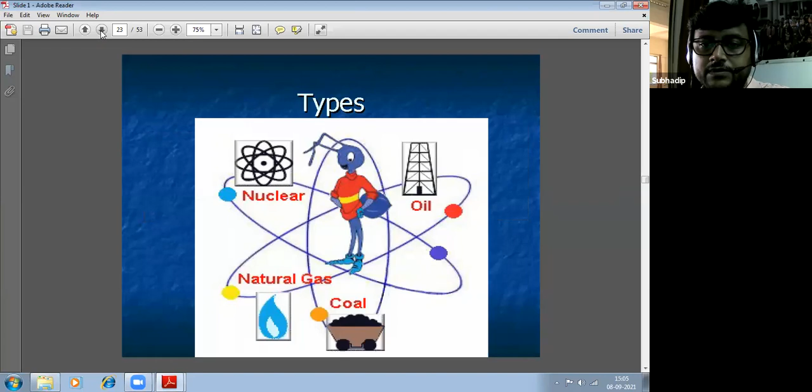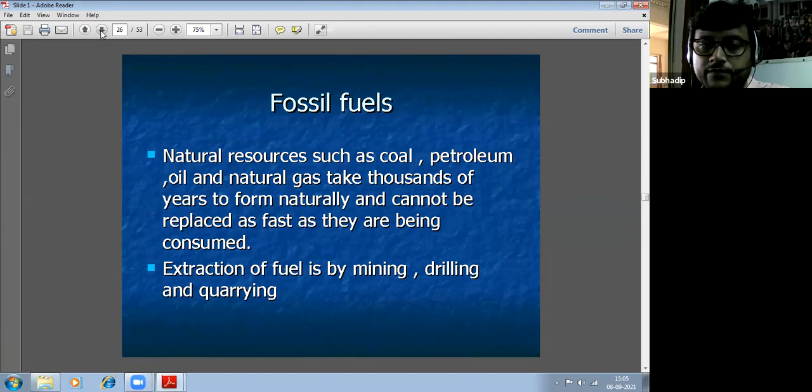On the last day, regarding renewable energy and non-conventional energy, we discussed the non-renewable sources like nuclear power, and the types: nuclear, oil, natural gas, and coal. Coal, petroleum, and gas - this introduction we have discussed, including fossil fuel and how coal can be made. And how coal is prepared, we gave a brief introduction regarding this.

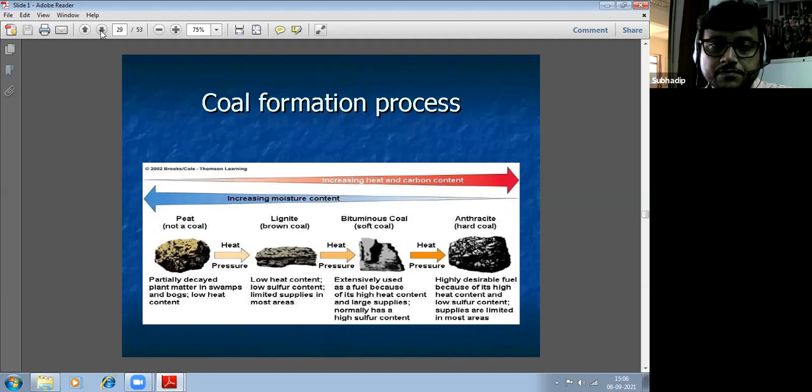Then the coal formation processes, and what are the different disadvantages of coal. When coal is burned, it produces carbon dioxide that causes global warming. Since coal contains impurities like sulfur and nitrogen, it produces toxic gases during burning, which causes acid rain and air pollution. Traces of mercury and radioactive compounds are also released when coal is burned, causing severe human health threats like lung disease.

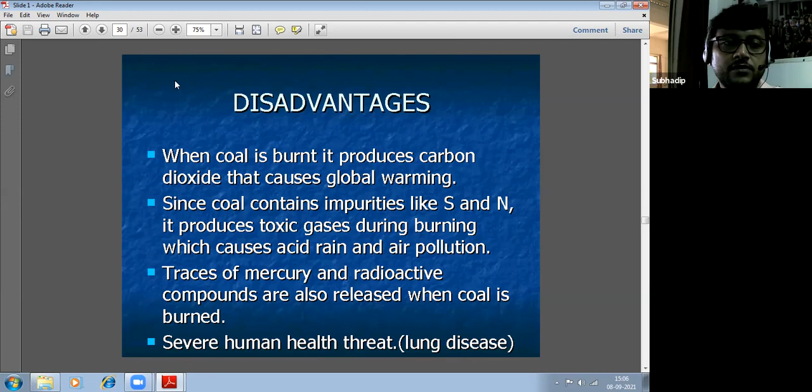Now, oil and natural gas. India has about 0.04% of the world's proven reserve of hydrocarbons.

Using distillation, we are able to separate... Actually, I'm having a mouth ulcer, so that's why I'm not able to talk properly.

Crude oil is made of many different compounds, each with its specific boiling point. Using distillation, we are able to separate out these compounds and turn them into commercial products ranging from gases to asphalt.

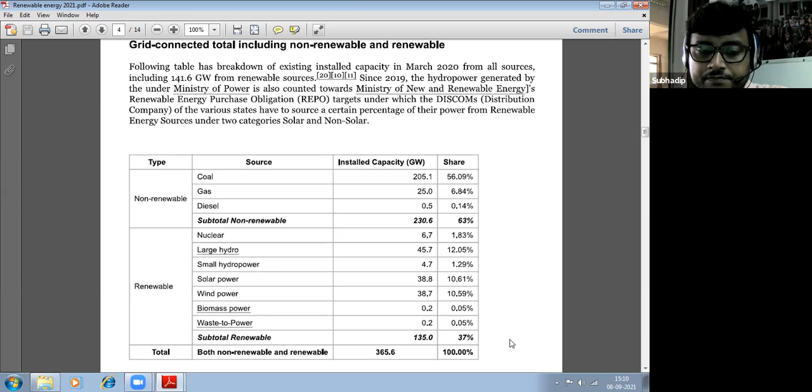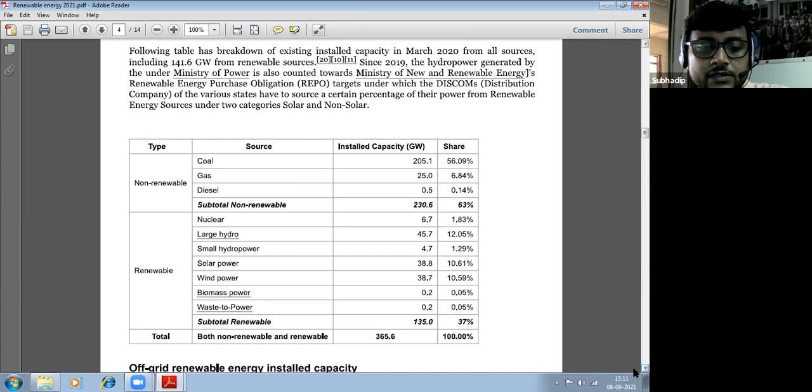Small hydropower has 4.7 gigawatt, solar power has 38.8 gigawatt, wind power has 38.7 gigawatt, biomass power has 0.2 gigawatt, waste to power is 0.2 gigawatt, and separately from renewable we have 135 gigawatt. So from both non-renewable and renewable, we have totally 365.6 gigawatt installed capacity.

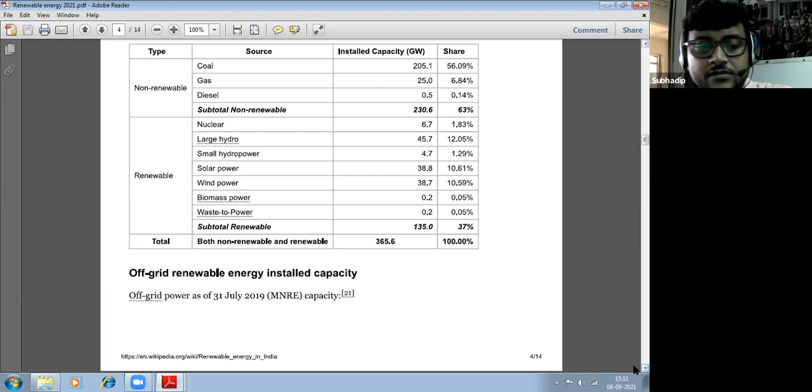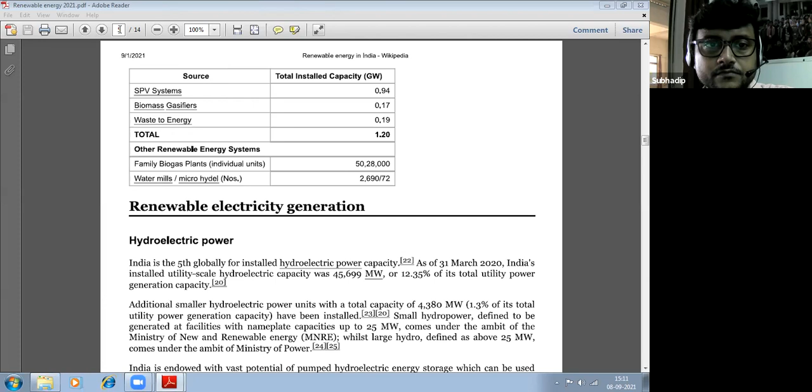Now another thing - off-grid renewable energy installed capacity as per 31st July 2019. This is the source and the total installed capacity: SPV systems having 0.94 gigawatt, biomass gasifier 0.17 gigawatt, waste to energy 0.19 gigawatt, and total is 1.20 gigawatt.

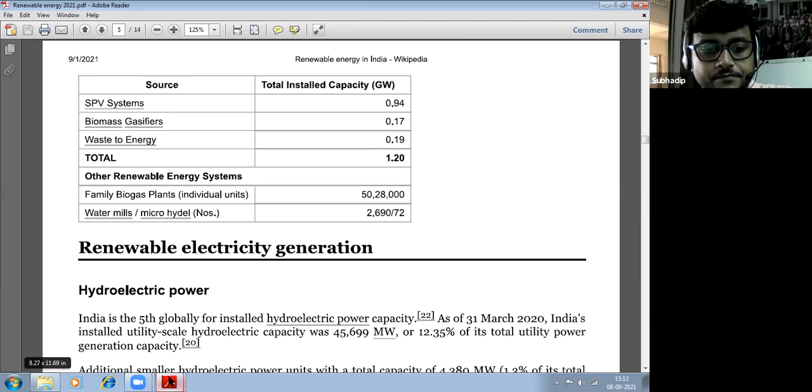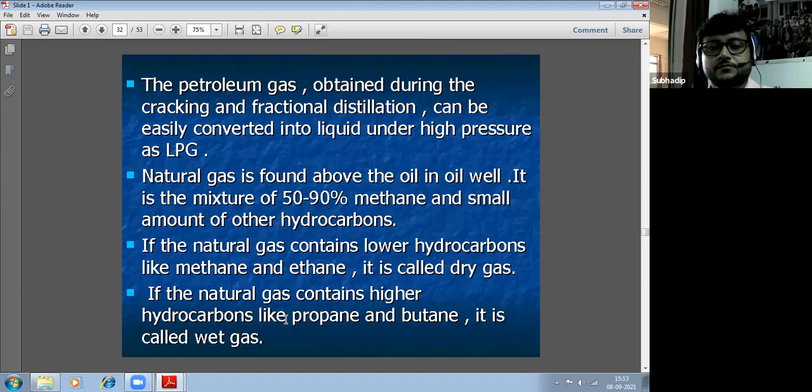Next, petroleum. Petroleum or crude oil is a naturally occurring flammable liquid consisting of a complex mixture of hydrocarbons with small amounts of sulfur, oxygen, nitrogen of various molecular weights, and other organic compounds that are found in geological formations beneath the Earth's surface.

How are oil and gas made? In the ocean, 300 to 400 million years ago, tiny sea plants and animals died and were buried on the ocean floor. Over time they were covered by layers of silt and sand, and about 50 to 100 million years ago, the remains were buried deeper and deeper. The enormous heat and pressure turned them into oil and gas. So from these sea plants and animals, we get oil and gas.

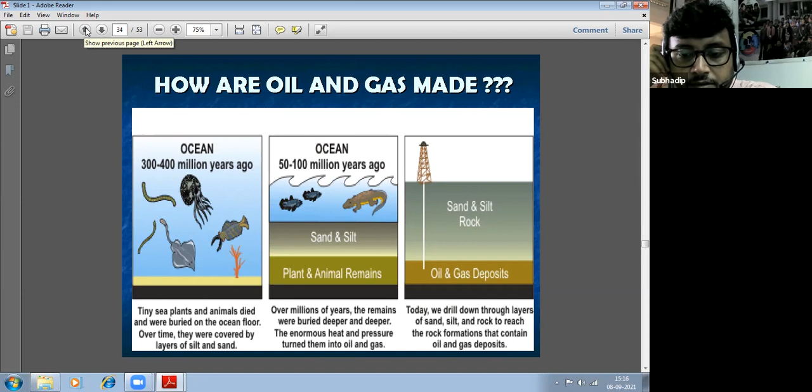When we heat the crude oil, sometimes we get diesel oil, then heating oil, aviation fuel, then gasoline, and then gases. So there are different segments for obtaining the different products at different stages.

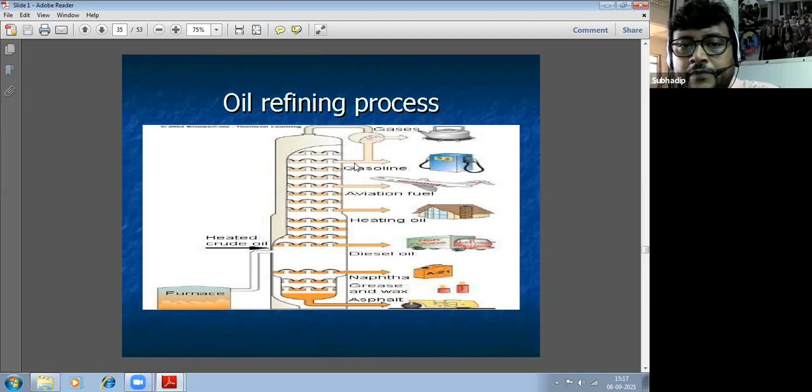Now what are the advantages and disadvantages of natural gas? Natural gas has ample supplies, high net energy yield, low cost with huge subsidies, less air pollution than other fossil fuels, lower carbon dioxide emission than other fossil fuels, moderate environmental impact, easy transport by pipeline, low land use, and it is good fuel for fuel cells and gas turbines.

What are the disadvantages of natural gas? It releases carbon dioxide when burned, and methane, which is also called a greenhouse gas. It can leak from the pipeline, and can be shipped across the ocean as highly explosive LNG. Sometimes it is burned off and wasted at wells because of low price.

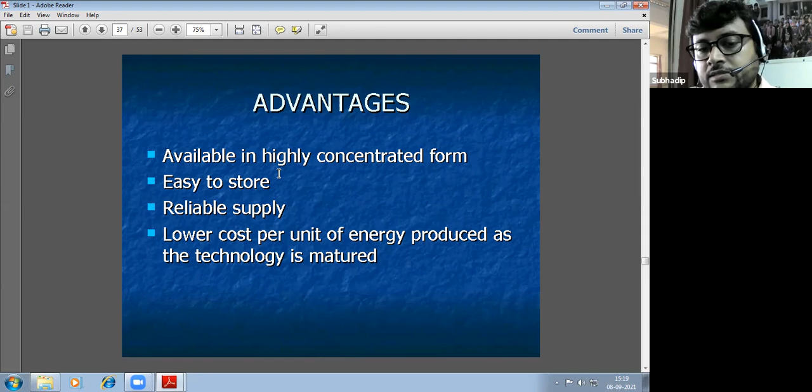So what are the advantages of conventional sources? It is available in highly concentrated form, because when required, you can directly go and purchase it. It depends on our storage from year to year. It is easy to store, has reliable supply, and lower cost per unit of energy produced as the technology matures. The disadvantages are: it is highly polluting, available only in few places, has high running cost, limited supply, and will one day get exhausted.

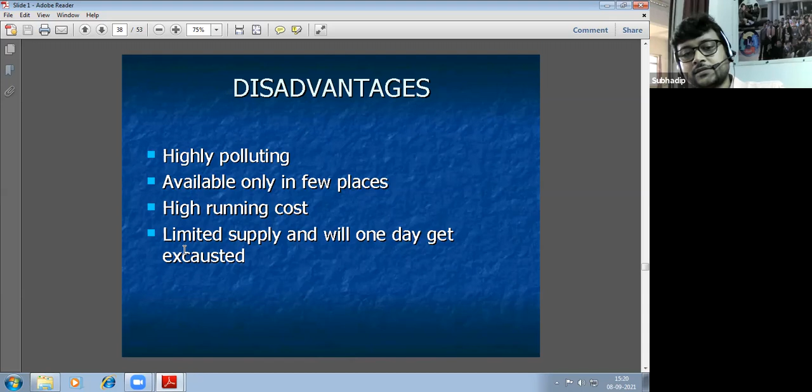Now how do we use it? Whatever renewable energy and non-renewable sources of energy like fossil fuel, gas, petroleum, we are using in different stabilizers, UPS inverters, cable set top boxes, and equipment.

Like a 0 watt bulb, which actually consumes 12 watts, sometimes 6 watts, sometimes 12 watts, as per the design and manufacturing of the industry. Mosquito repellents consume 10 watts. Mobile chargers consume 5 watts. Voltage stabilizer consumes 25 watts. UPS inverter consumes 40 watts. Cable set top box consumes 25 watts.

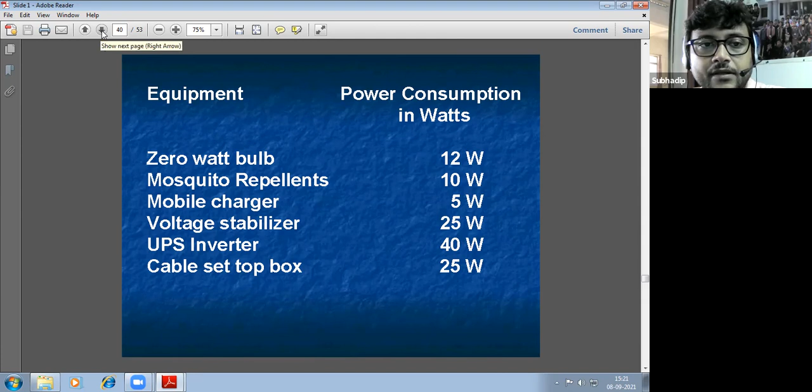Equipment running in standby mode has this power consumption in watts: compact audio system consumes 27 watts, DVD, CD, VCD player consume 12 watts, microwave oven consumes 6 watts, inkjet printer consumes 5 watts, and TV consumes 22 watts.

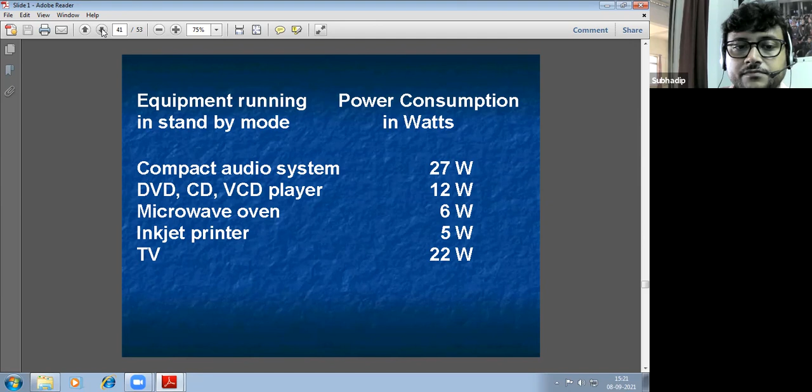Asian energy sources released 1256.4 million metric tons of methane. This is as per the old record, I could not find a new record. If I find it, I will send it to you. So Asian energy sources released 1256.4 million metric tons of methane, 3,228,000 metric tons of nitrous oxide.

1,021.1 million metric tons of carbon dioxide, 1,242.4 million metric tons of carbon dioxide equivalent of hydrofluorocarbons, perfluorocarbons, and sulfur hexafluoride.

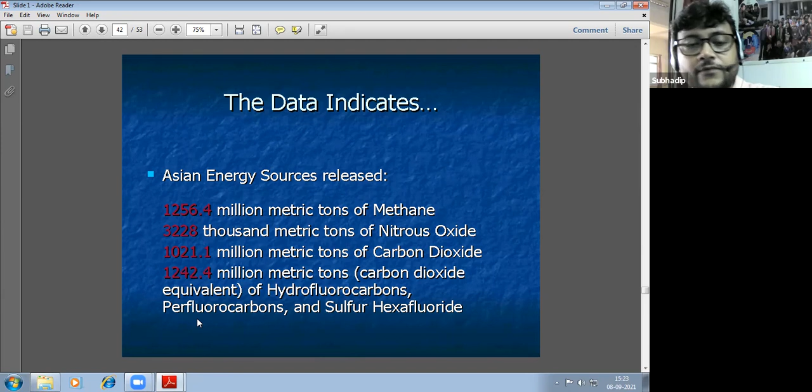Now why to conserve? Conserve is basically in terms of energy conservation. There is a difference between energy conservation and conversion of energy. So why conserve?

We have limited fuel available on earth, and our demand for energy is increasing day by day, because population is increasing. If population increases, the number of households automatically increases. Then the demands of jobs, working principles, and working networks are increased. So it is possible that someday most fuel will be exhausted and we'll have to switch over to alternate energy.

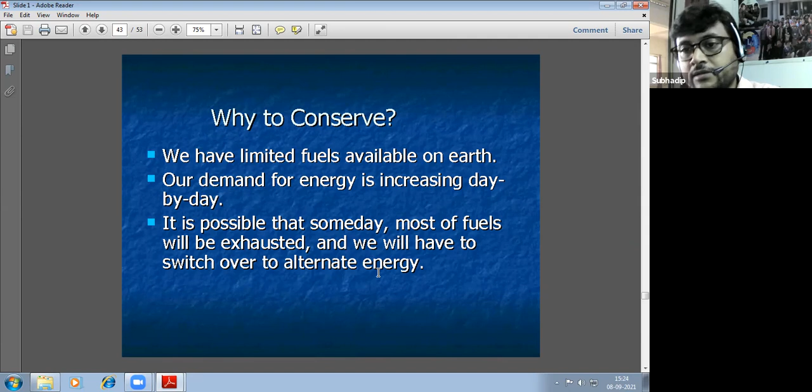Now, why energy efficiency? The countries facing power shortage have peak shortage of 13% and average shortage of 8%. And additional power required by 2012 is approximately 1 lakh megawatt.

So in the year 2012, there is an investment of 8 lakh crore. India's energy intensity per unit of GDP is higher by 3.7 times of Japan, 1.48 times of Asia, and 1.5 times of USA. So there is higher wastage of energy and very high energy saving potential.

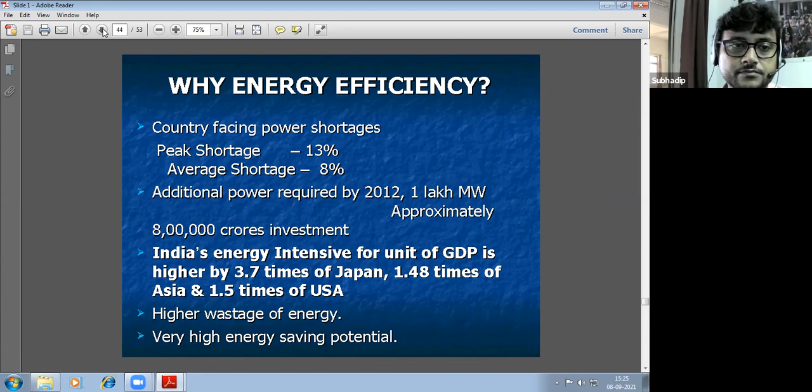The easy solution, no cost. Energy item, that is lighting. Lights off when not in use, and use daylighting. This gives savings of 8 to 20% of the lighting energy.

Heating and air conditioning. If we set the thermostat as low as possible. Now, if I simply talk about the refrigerator: suppose there are very few items kept in the refrigerator, I'm not talking about the deep fridge, but if it's a double door, you can maintain the speed in low position. So set the thermostat as low as possible. For each degree, up to 5% will be saved.

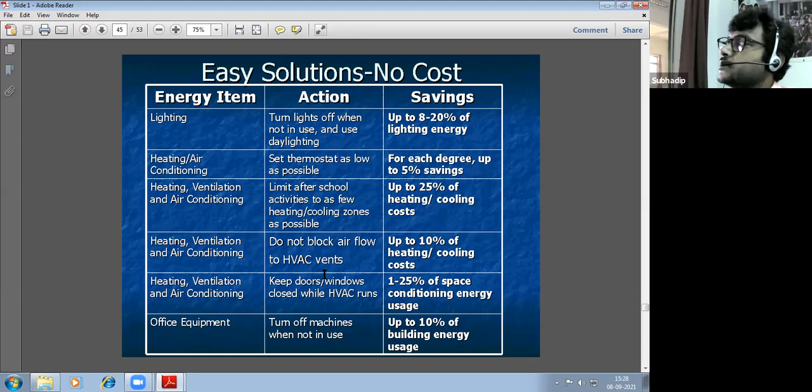Heating, ventilation, and air conditioning: do not block airflow to HVAC vents, because the vents collect hot air, and if dust is not cleared from time to time, the efficiency will come down. So if we clean it regularly, up to 10% of the heating and cooling cost will be reduced.

Heating, ventilation, and air conditioning: keep doors and windows closed while the HVAC runs. If your doors and windows are closed, it will take less time to cool the room. In that case, 1 to 25% of the conditioning energy use will be saved.

And office equipment: turn off the machines when not in use. When your office is over and you go back home leaving all the lights and fans on, that is a wastage of energy. If you switch off at the proper timing, you can save 10% of the energy bill.

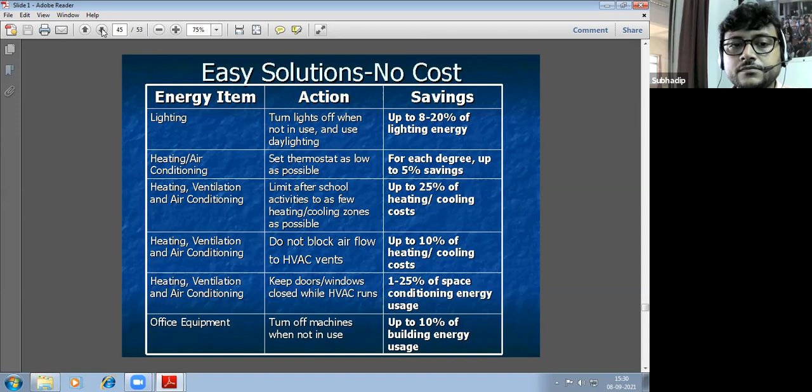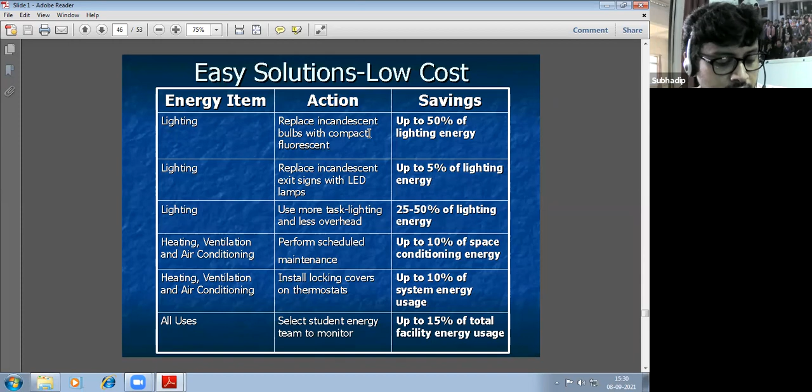Now for lighting again, if you replace incandescent bulbs with compact fluorescent lamps, you can save 50% of the energy. Another option nowadays is LEDs. If you also replace compact fluorescent lamps with LEDs, you can save another 5 to 10% of the energy.

Use more task lighting and less overhead. Less overhead means when direct, bright illumination is not required, there's no need to put on the full amount of lights. In that case you can save 25 to 50% of the lighting energy.

Now, heating, ventilation and air conditioning. If you perform scheduled maintenance, meaning servicing every year, properly, you can manage to save up to 10% of the energy.

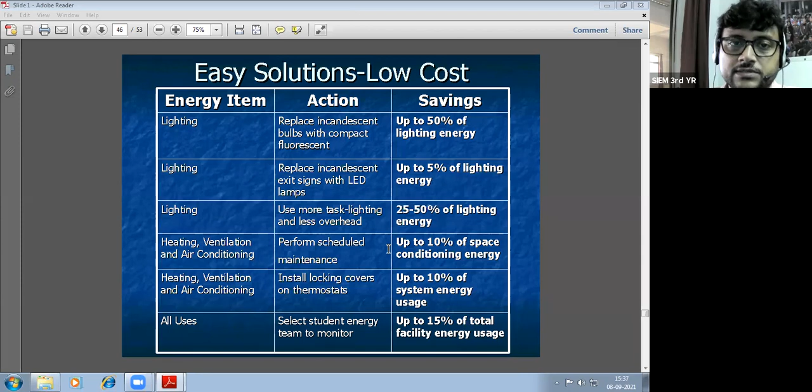Why are we doing this? Because whenever we consider fossil fuel, coal, we get electricity directly in large amounts. But day by day, in the coming days, we have to fully depend on renewable energy sources. Not only in India but in the whole world, we are not capable of generating or installing power at a large scale. So we also have to go in a certain way, so that by replacing some kinds of lamps, you can save some energy.

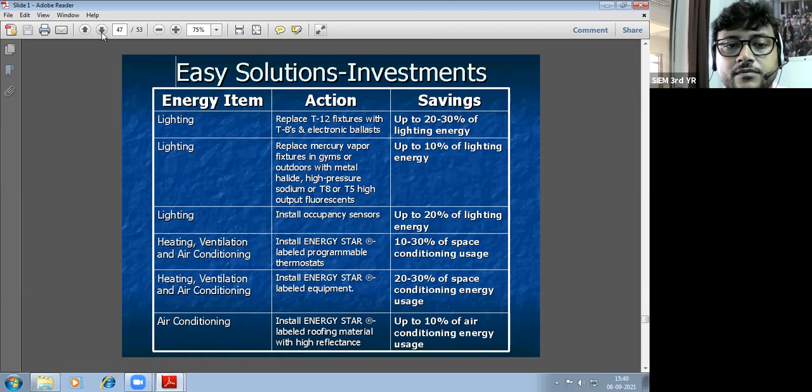Energy Star products meet strict energy efficiency standards set by the US EPA and US Department of Energy. In 2005, the US saved enough energy to avoid greenhouse gas emissions equivalent to those from 23 million cars.

Please come after 15 minutes.

It saved $12 billion in utility bills and helped avoid 28,000 megawatts of peak power.

So this chapter, the introduction chapter, actually consists of these things. By tomorrow I'll put this in your ERP portal.